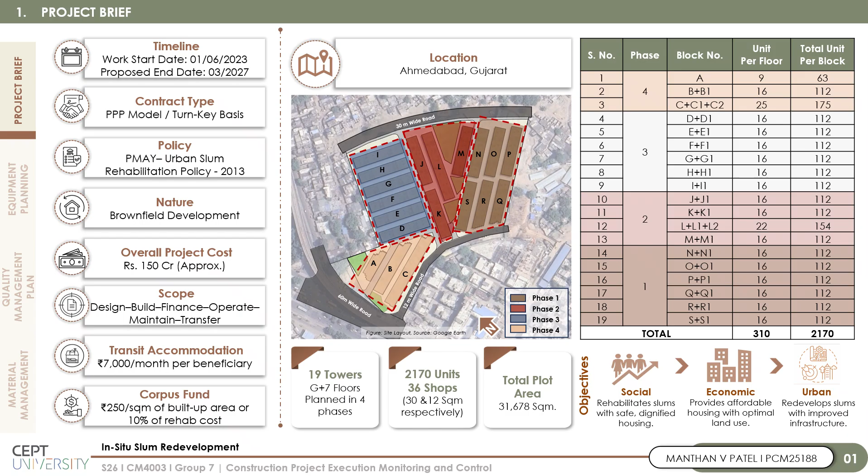In today's construction industry, construction equipment is a vital resource. It accounts for 15 to 40% of the total project cost. The study included earth moving equipment, lifting equipment, reinforcement yard equipment, and RMC equipment, including batching operations. The selection of equipment was based on productivity requirements, execution duration, operational efficiency, and cost optimization.

On our site, there were some blocks in which raft foundation was done and some blocks had pile foundation. One of the equipment used for excavation is the Komatsu PC210. It has a daily productivity of 624 cubic meters, which is about 78 cubic meters per hour. The quantity to be excavated for one block is about 20,309 cubic meters, and the duration considered is 41 days, which gives roughly about 495 cubic meters of excavation per day. So the production required is less than the productivity, meaning the number of excavators to be deployed is 1. Similarly, the deployment requirement for other equipment was calculated.

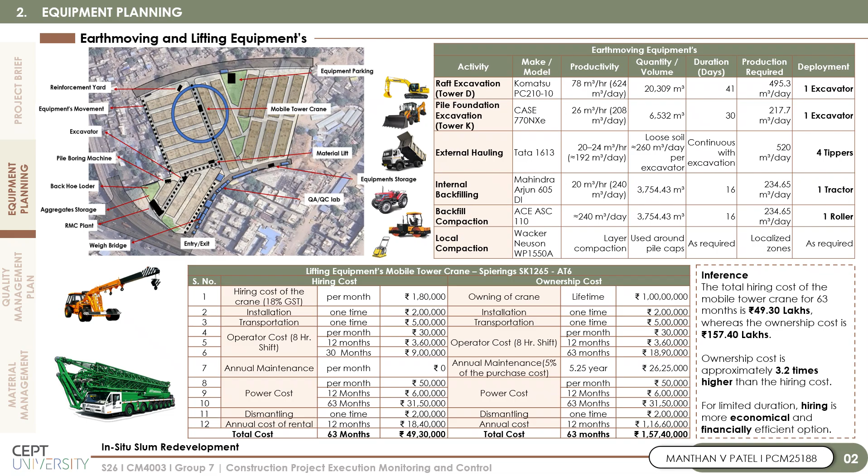For the lifting operations on site, there was no such specific equipment. So we are proposing a mobile tower crane. A Spierings SK1265-AT6 mobile tower was proposed. A cost comparison was performed between rental and ownership models. The total hiring cost for 63 months was calculated as approximately 49.30 lakh rupees. On the other hand, the ownership cost for the same duration was about 157.40 lakh rupees. This means the ownership option was nearly 3.2 times more expensive than hiring.

Moving forward to the reinforcement equipment. The reinforcement yard planning included bar cutting machines and bar bending machines. The total steel yard area planned was approximately 139.89 square meters. Operating cost included electricity charges, labor cost, and steel foreman cost. The operating cost per machine per day was calculated as approximately 4,026 rupees. The total reinforcement equipment cost at peak operation was about 21,39,427. At peak stage, the total reinforcement quantity handled was around 2,92,882 kgs. This resulted in an equipment handling cost of approximately 7.3 rupees per kg of reinforcement.

The project proposed a 50 cubic meter per hour capacity RMC batching plant. The equipment setup included cement silos, transit mixers, concrete pumps, and needle vibrators. The total RMC equipment cost was calculated as approximately 1.52 crore rupees. The total plant concrete quantity was approximately 51,740.92 cubic meters. Based on these, the equipment cost per cubic meter of concrete was about 293.62 rupees. The study also evaluated machine depreciation, maintenance, insurance, and salvage values. These helped us understand life cycle costing of construction equipment.

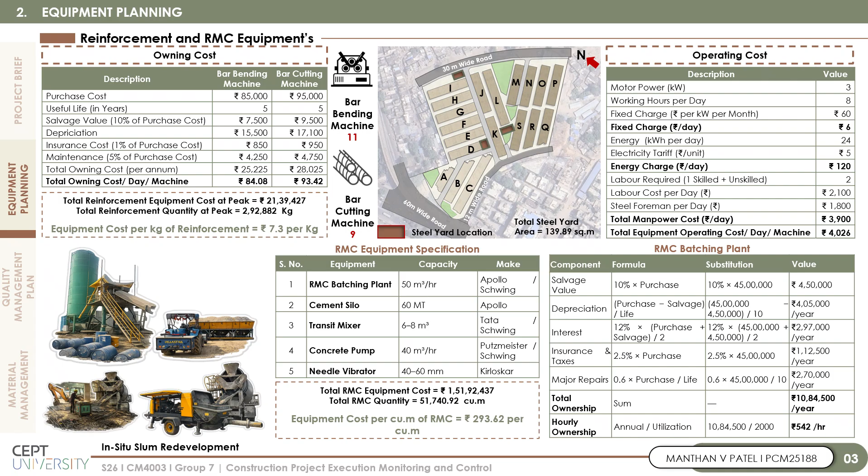The next important area studied was the quality management plan, which included the quality assurance plan as one of its key components. The QAP covered major aspects such as quality objectives, document control, procurement procedures, inspection and testing plans, method statements, NCR management, audits, and handover procedures.

The project follows a structured quality management system involving the client, developer, contractor, PMC, and third-party testing agencies. According to the tender clauses, the contractor is required to maintain a fully equipped on-site quality control laboratory. Approximately 70% of testing is conducted at the site laboratory, while 30% is carried out at external laboratories, of which 15% is in government laboratories and the other 15% in private laboratories.

Concrete quality verification is done as per IS 456 standards. The contractor is also responsible for all testing and quality control expenses. The project uses a fully automatic computerized batching plant for design mix concrete.

The project management consultancy plays a major role in project execution and monitoring. The PMC is mainly responsible for project planning and monitoring, quality supervision, stakeholder coordination, billing verification, and reporting. The PMC acts as an interface between the client, contractor, and developer to ensure smooth execution.

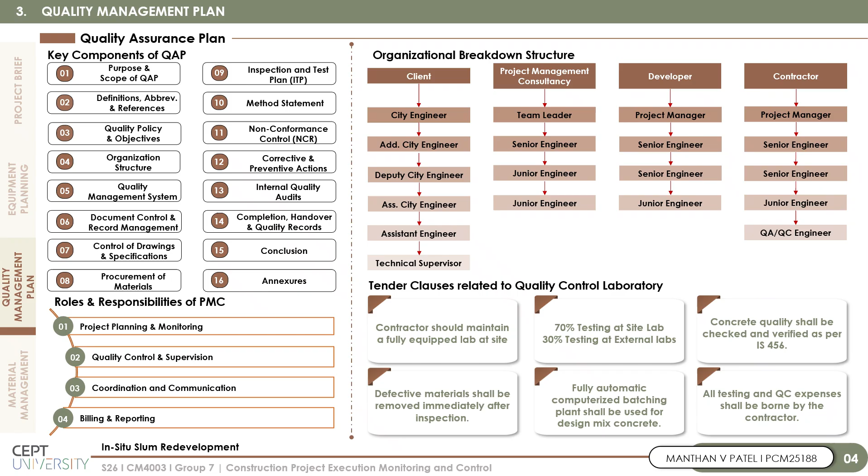A detailed study of quality control documentation was carried out. This included checklists, inspection reports, method statements, and non-conformance reports. The NCR system helps identify defects, analyze root causes, and implement corrective actions. The QA/QC team from the contractor side prepares and maintains NCR records, while the PMC reviews and approves them.

A checklist is prepared to ensure work is completed systematically, accurately, and according to the required standards and safety procedures. The RCC checklist includes pre-pour inspections, slump test, cube testing, reinforcement checks, safety checks, and post-pour inspections. The study also highlighted the importance of documentation and record management in maintaining construction quality.

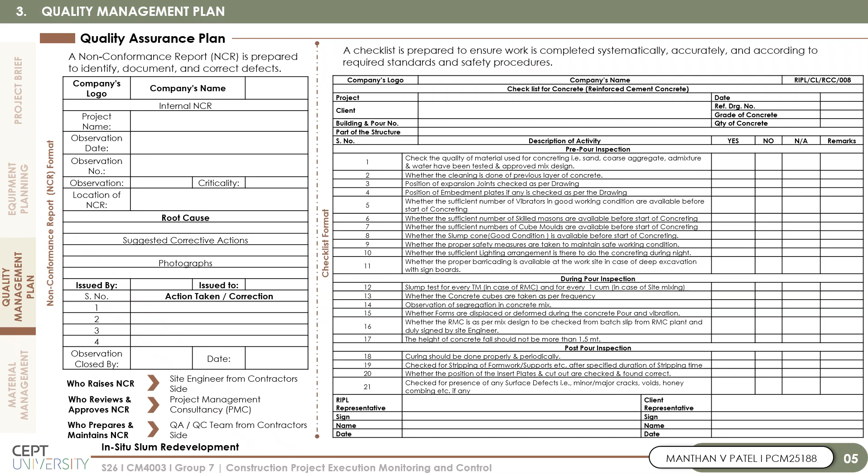The quality management plan also included linear responsibility charts and RACI matrices to understand stakeholder involvement. A RACI matrix was prepared where R stands for responsible, the person who performs the activity. A stands for accountable, the person ultimately answerable for the activity. C stands for consulted, stakeholders whose inputs are required. I stands for informed, stakeholders who are updated about progress.

Two types of analysis were carried out from the matrix. First was the vertical analysis. Vertical analysis studies the involvement of each stakeholder across all project activities. In this analysis, we counted how many times each stakeholder was marked as responsible, accountable, consulted, or informed. This helped identify which stakeholder had the highest participation and decision-making authority during execution.

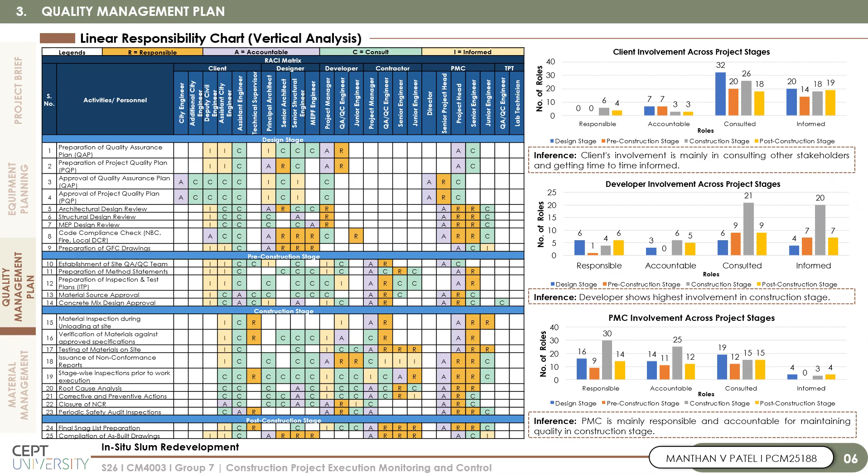From the analysis, we observed that the developer had the highest involvement during construction execution. The client's role was mainly focused on consultation and periodic review, while the PMC was mainly responsible and accountable for maintaining quality in the construction stage. This analysis helped us understand accountability, communication flow, and decision-making hierarchy on each level within a large project.

The second analysis done was the horizontal analysis. In the horizontal analysis, each activity is analyzed individually to understand how responsibilities are distributed among different stakeholders involved in the project. This analysis helped identify whether an activity has a balanced responsibility structure or whether there is an excessive dependency on certain stakeholders. It also helps evaluate coordination requirements, communication complexity, and decision-making efficiency for each construction activity.

For every activity, the number of people marked as responsible, accountable, consulted, and informed is counted and interpreted. Activities having multiple responsible persons indicated shared execution responsibilities. While this improves collaborative working, it may sometimes create confusion regarding ownership of the task if roles are not clearly defined.

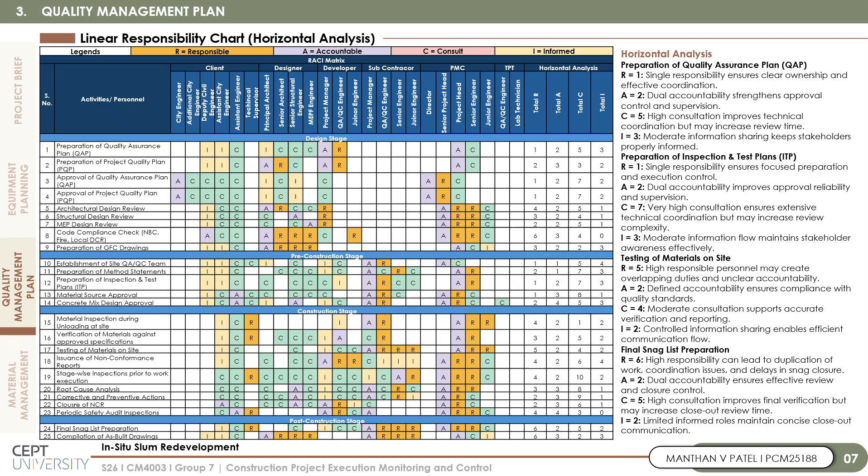Overall, the horizontal analysis showed that activities with balanced responsibilities and accountability structures perform more efficiently, while activities involving excessive consultations or too many responsible persons may face coordination challenges and slower decision making. Therefore, proper role clarity and controlled stakeholder involvement are essential for effective project execution and quality management. Next, moving forward to the material and inventory management.

Material management plays an important role as it helps in controlling materials and reducing overall project cost. In most construction projects, materials like cement, steel, and aggregates usually make up 50 to 60% of the total share.

A detailed material inventory management study was carried out using the classic EOQ models along with lead time and material inward flow analysis. The material inward process shows the systematic flow of AAC block procurement, starting from estimating the requirement and supplier coordination to transportation, material receipt, and recording at site. This helps maintain proper inventory control and uninterrupted workflow.

The transportation analysis shows the total delivery cycle takes approximately 8 hours, including loading, unloading, and travel time. The lead time study includes purchase requisition generation, approvals, PO processing, testing, and GRN issuance, resulting in a total lead time of around 6 days. This highlights the importance of advanced procurement planning.

Using the classic EOQ model, the optimum order quantity for AAC blocks was found to be approximately 377.37 cubic meters, where ordering cost and carrying cost are balanced at around 35,850 rupees, resulting in a minimum total inventory cost. The graph shows that the ordering cost decreases and carrying cost increases with increasing order quantity, and their intersection point gives the optimum EOQ value.

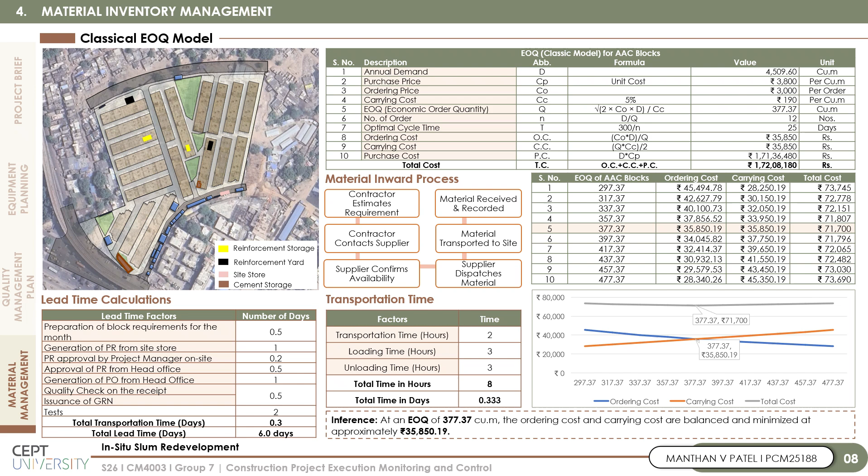The reconciliation of steel reinforcement was carried out to compare the total available steel, consumed steel, allowable wastage, actual wastage, and closing stock. The analysis showed that out of 493.81 metric tons of available steel, around 292.89 metric tons was consumed, while the actual wastage was limited to 8.2 metric tons, that is about 2.8%. This is under the allowable wastage limit of 3%. This indicates effective material utilization, proper inventory control, and reduced material loss during execution.

Next, the HML analysis was performed based on the unit cost of material. In the high category, binding wires, steel, and AAC blocks were identified because of their higher unit cost. These materials require strict monitoring, secure storage, and careful procurement to avoid wastage and theft.

In the medium category, cement and admixtures were included, as they have moderate unit cost and require periodic monitoring and planned procurement. In the low category, sand and coarse aggregates were classified because of their lower unit cost. These materials require comparatively simple inventory control practices. Overall, the HML analysis helps prioritize material focus and improve resource allocation based on material cost importance.

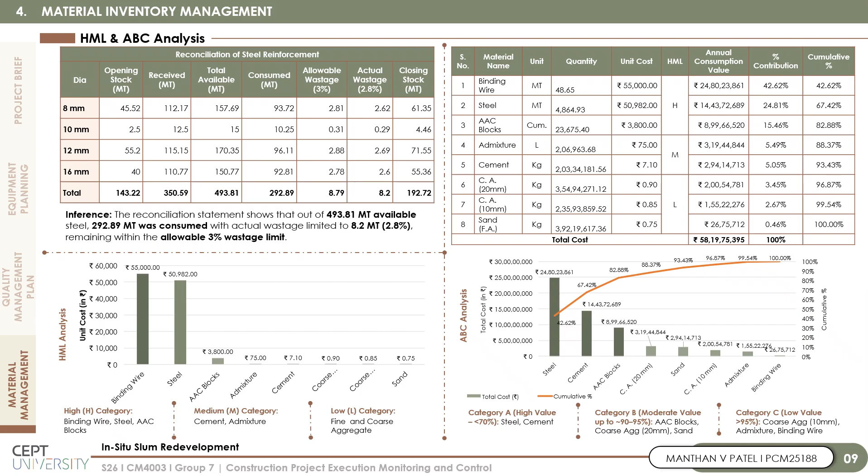From the above discussion, proper equipment planning improved productivity, cost control, and workflow efficiency. Hiring the tower crane for 63 months at approximately 49.3 lakhs was more economical than ownership costing around 1.57 crores. Reinforcement equipment achieved a cost efficiency of approximately 7.3 rupees per kg of steel handled. RMC equipment achieved a cost efficiency of approximately 293.62 rupees per cubic meter for handling about 51,740 cubic meters of concrete.

In the quality management plan, QAP, NCR, checklists, and inspections ensured systematic quality control during execution. The PMC had the highest involvement in maintaining construction quality and execution coordination. Regular inspections and testing helped reduce defects, rework, and quality issues. Clearly defined stakeholder responsibilities improved coordination, accountability, and compliance.

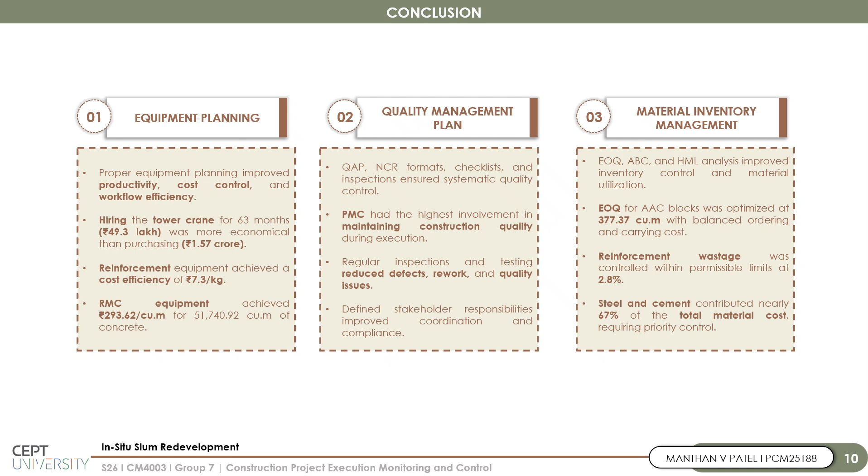From the material inventory management, EOQ, ABC, and HML analysis improved inventory control and material utilization. The optimum EOQ for AAC blocks was found to be approximately 377.37 cubic meters, balancing ordering and carrying cost. Reinforcement wastage was controlled within the allowable limits at around 2.8%. Steel and cement contributed the highest share of material cost and therefore require priority monitoring and control.